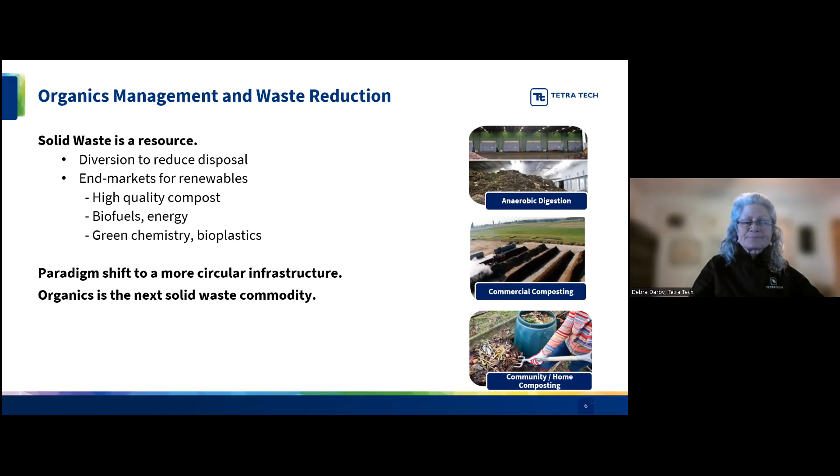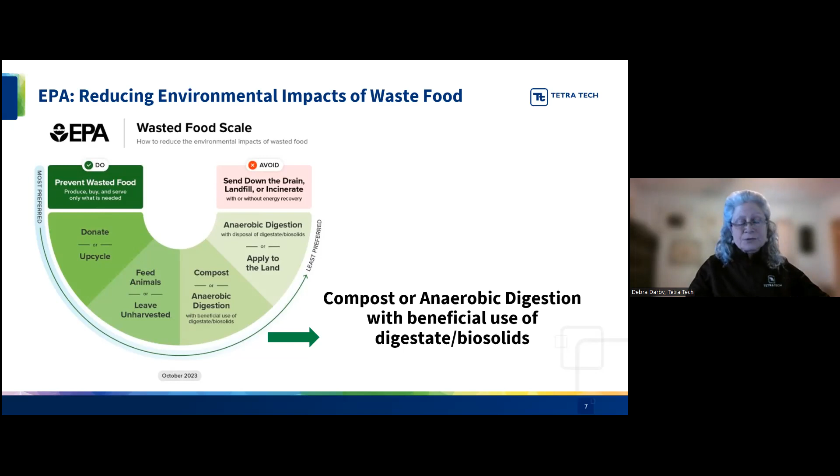And I think as more states and local governments begin their planning process and look at materials management, organics certainly is a primary material for managing and developing infrastructure. And as we look at quantifying the methane emissions, we know that organics makes up 50% of the municipal solid waste stream, and the EPA reports that food waste alone is 24% of MSW that's disposed or trapped in landfills. EPA does report that 58% of fugitive methane emissions are from landfilled food waste.

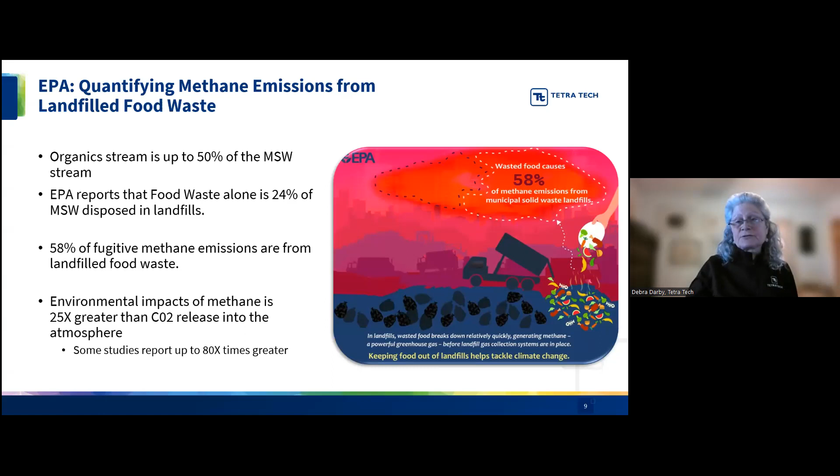And keeping food waste, organics out of landfill does help reduce emissions. And when we talk about organics management, we really are talking about climate mitigation. And the environmental impact of methane is pretty significant, being 25 times greater than CO2 released into the atmosphere. So it's important that we have these conversations and look at how we can manage organics and develop infrastructure for beneficial reuse of a very valuable material.

And then just quickly, I always like to talk about environmental justice. There's certainly a lot of states throughout the Northeast that have implemented environmental justice laws, policies, and regulations. And the Northeast is really leading in that space. And federally, a lot of grants have been issued last year, in particular the Solid Waste Infrastructure for Recycling grant that is helping states and municipalities focus on materials management planning and supporting organics infrastructure.

But I also like to call out the Justice40 initiative. This is a law and a policy that helps to direct 40% of overall benefits of certain federal investments and grants, including but not limited to clean energy, energy efficiency, remediation of legacy pollution, and clean water infrastructure. And this is to benefit disadvantaged communities or overburdened communities. So again, as we look for siting of organics infrastructure, the environmental justice lens is really an important component of this.

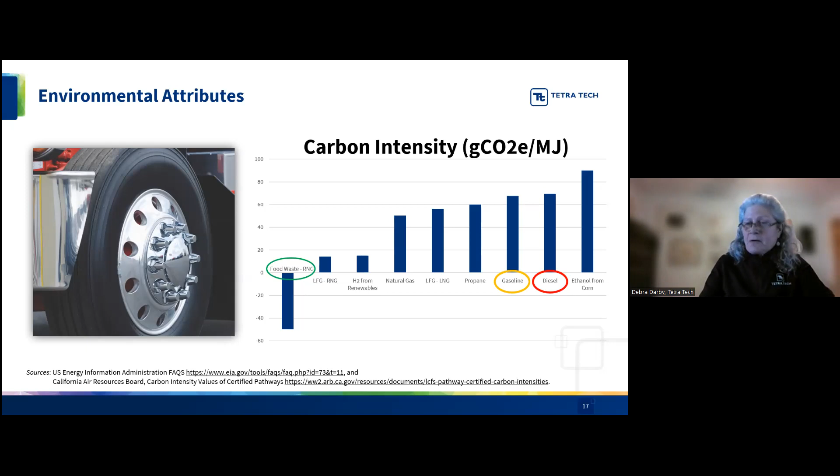So I am going to now turn this over to Peter Klaassen, and he's going to take us into a more in-depth discussion.

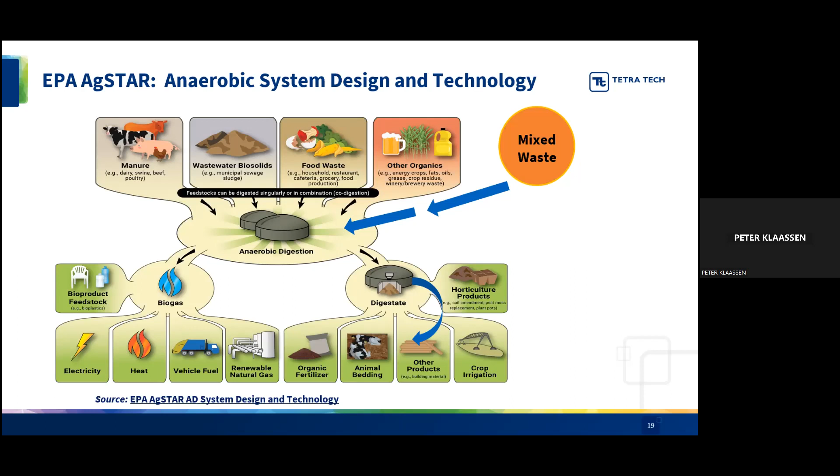But if you look at the bottom, you'll see there are 2 kinds of products. One of them is the biogas. And what do you do with the biogas? It can be used for heating, as RNG into the gas network, or to generate power. On the other side, you're also creating a digestate. Once you've extracted some of the carbon in the organic materials, you're left with a carbonous compound, which can be used for things like fertilizer, carbon supplement for agricultural applications, and other real products. So next slide.

So from a technology perspective, there are 3 different types of technologies. There are others, some tested, some not. But I'd say most of the AD facilities in existence in Canada and the US are dry AD, and there are typically 2 types: one is a garage style, and the other one is a plug flow digester. Then wet AD, which we have a lot of experience in, typically coming from the wastewater treatment industry.

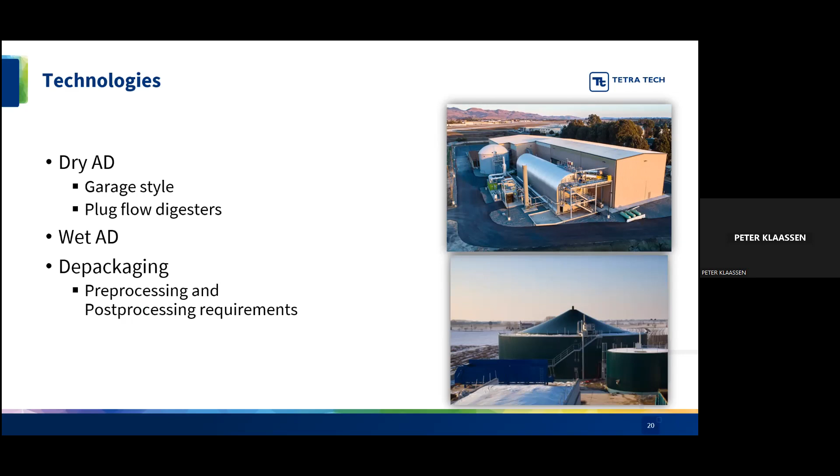Related to that, you have to have a mechanism to, I'll call it, clean the waste. You either do it in the front end, which we call pre-processing, or in the back end, which is post-processing. For certain technologies, it's better to clean the waste in the front end. In some cases, you can do it in the back end. But if you don't have a proper depackaging process, the system may fail. And we've seen a few cases throughout Canada and the US where it has failed.

Next slide. So I'll talk now about the dry anaerobic digestion technologies, the garage style and the plug flow. The garage style is basically a process where you have a chamber, and in that chamber you allow the organics to decompose. You produce a gas, which goes into some type of storage area, you extract that gas, and then it goes on to be cleaned or whatever you want to do with it. Plug flow digesters are a little bit more sophisticated.

They basically take the waste, it goes through typically a chamber where it churns it. You may add back moisture if you have moisture being extracted. And again, it generates gas. In both cases, you're looking at approximately a 20 to 30 day processing in order for you to be able to extract the maximum amount of gas from it.

Where these are used more is where you have high solids. So this can be anywhere from 20 to 50% of the total amount of material. And you'll see on the other end, you have the wet digestion, which typically you're looking at a lower solid content.

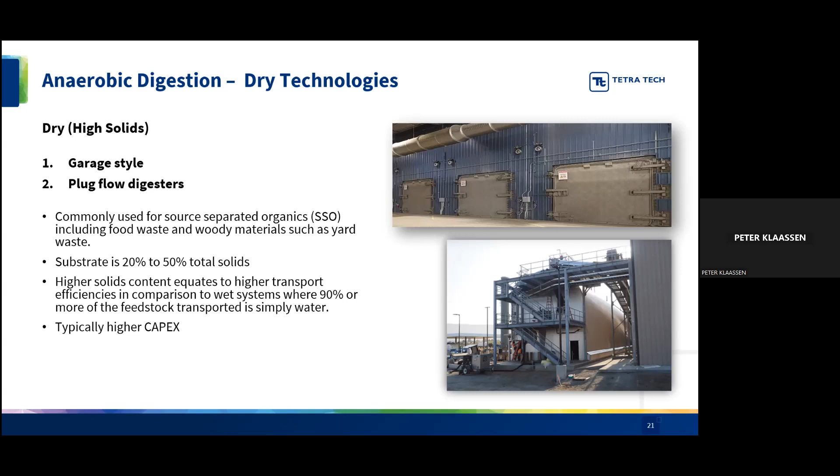Now, what's the benefit of these two types of processes? It has an impact on transport cost, and in that case, it can be in both the front end and the back end. It also allows a greater amount of type of material that you can bring into the facility. And I'll explain a little bit more about that later. And typically these two processes have a higher capex or a higher capital cost than the wet digestion. Next slide.

So wet digestion is basically, I'll say they've learned their lesson in wastewater treatment plants. It basically has a pre-processing component where you try to remove as much contaminant in the front end as possible. And then it goes into a digester, and within that digester, you're creating the biogas. Typically, the slurry that you have is less than 15% total solids, which means that if you want to go with wet digestion, you may want to add water if you have a very dry feed.

What we're finding, in the last, let's say 2 years, I've personally been involved with over a dozen projects, and we're starting to learn from this. And that's why I'm saying the type of feed we're seeing has a significant impact on the type of technology that you use. So with wet digestion, you typically don't want to include yard waste to any great extent. You want to basically focus on food waste and biosolids from wastewater treatment plants, which is what I'm talking about below, where you have co-digestion.

What you're also seeing is that personal hygiene products such as diapers and even animal waste can be included in some of these processes, which means that with wet digestion, you potentially can expand what you put into the unit and basically then how much gas you get coming from it. So typically with wet AD, you get more gas than the dry and the plug flow type technologies.

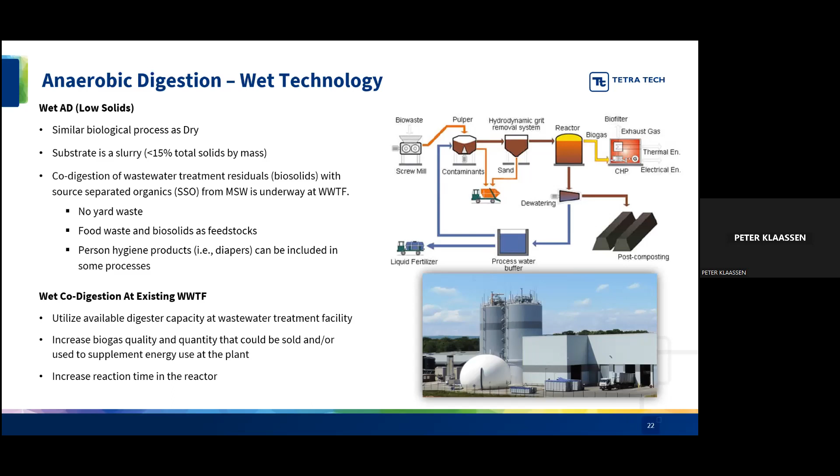And this is a case in Lethbridge, which is in Alberta, where they actually were potentially looking at adding food waste. One of the things that we've seen in these types of projects is you need to consider the amount of waste. And if you don't have a lot of food waste, then any of these projects is going to be potentially problematic from a financial perspective.

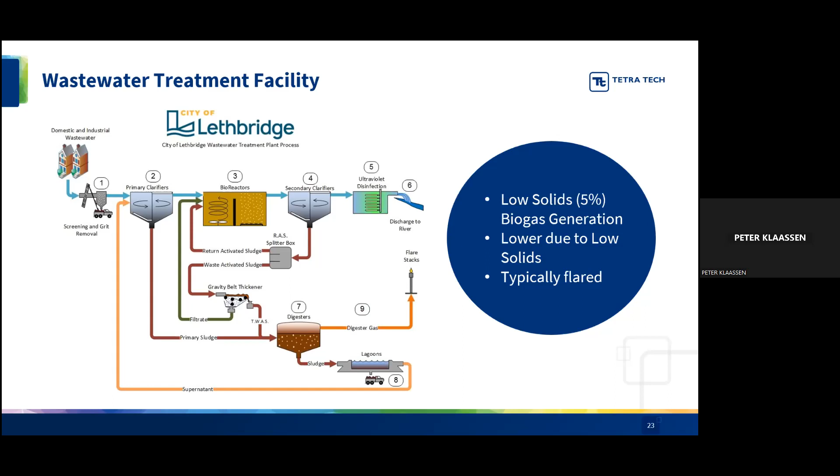So in this case, a wastewater treatment plant typically has a lot of water. So the solids are typically in the area of about 5%. And typically in most of these facilities, the gases are flared. But what if you could take that gas, clean it up, and then do something with that gas? So this is kind of the attraction that we're seeing more and more through municipalities in both Canada and the US. Next slide.

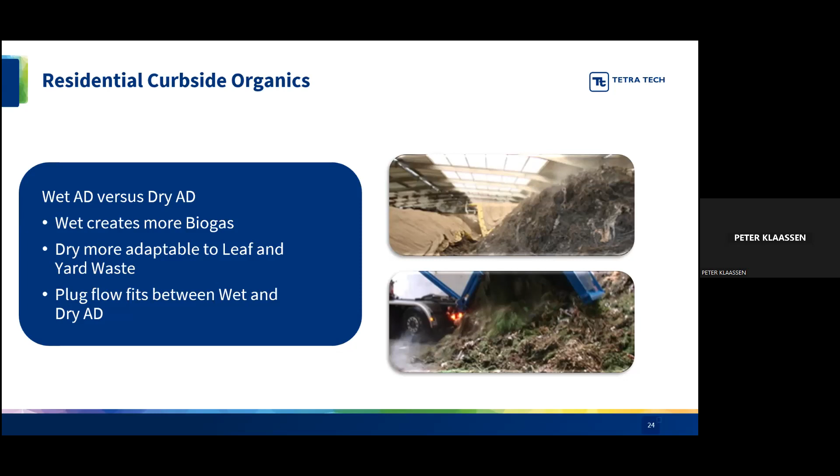Now, location. This is extremely important. And I've seen projects fail because of a variety of reasons. So one of them is, how close are you to the source of the material? So in the case of a city, you want to be fairly close to where the waste is generated and then transported to a facility.

And this also feeds into the timing. Like if you have to haul this material for a fairly large distance, it may create a problem because of the timing and because of other things that can result from that, such as odor.

On the other end, once you're finished doing your digesting, you have two important aspects to consider. One of them is, what are you going to do with that digestate? Because that digestate has to be hopefully used. I've seen cases where they couldn't find an end market for it and they had to bring it to the landfill, which kind of doesn't make sense.

Then you have the biogas that's generated. So if you create biogas and if your aim is to put it into the pipeline, you have to have a pipeline fairly close. And what we're finding is that the cost to build a pipeline, and it's not only the capital cost, it's the time in order to get a permit to get a brand new pipeline installed in order for you to be injected into the system.

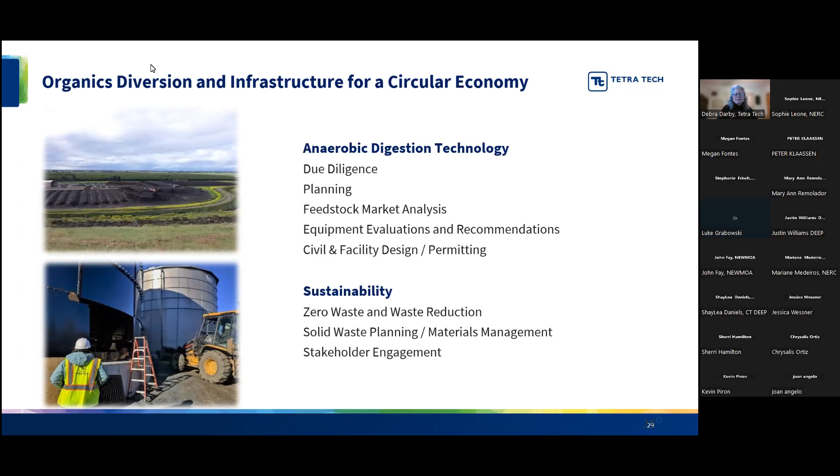Thank you, Peter. And as Peter said, due diligence and planning is so important. And what we're seeing now in the Northeast and across the nation is a focus on waste reduction. And as I mentioned earlier, a lot of grants are available and have been issued, and states are starting to implement materials management plans. And that does involve looking at organics as a material to manage properly and in developing infrastructure. And as we mentioned throughout our discussion today, stakeholder engagement, community involvement is so important to building out organics infrastructure. And I am just going to go to our next slide, I think.

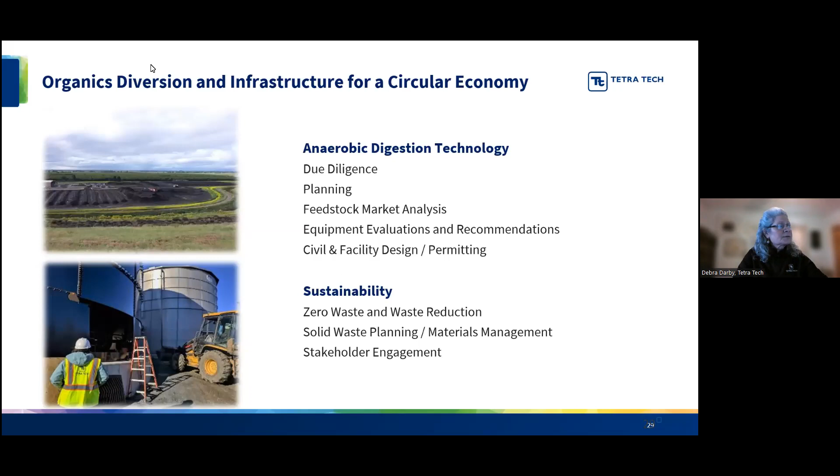And just to wrap up, there's a variety of anaerobic digestion technologies. And as we see the shift towards organics management, existing facilities, existing solid waste infrastructure should consider how to get involved with managing organics so that it's diverted from landfill and properly reused into a variety of renewable products. There is a growing need for developing infrastructure to service an area.

Peter talked about proximity, not only to the generators of the feedstock, but the neighborhood surrounding the type of facility, and leveraging opportunities that are starting to appear. Again, based on the pricing that Peter talked about with renewable natural gas and the potential for projects with utilities. And it is about developing end markets and generating revenue.

And just in closing, we look at this as a circular economic opportunity where we can take food waste, food materials that were grown with a lot of different inputs from the growers through to the distributors and the resellers and wholesalers to the consumers, and how do we turn that back into renewable products and energy.